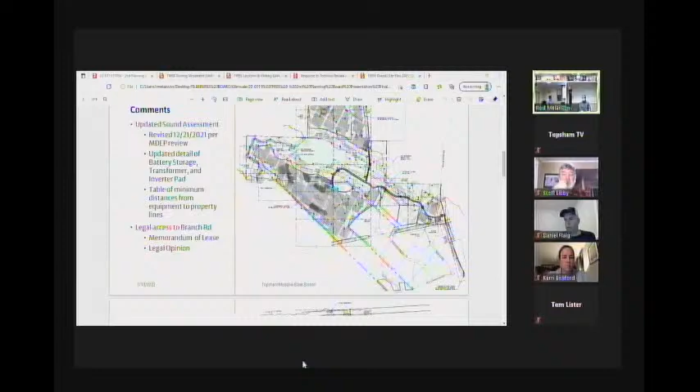So again, we'll start with sound. Through the course of the DEP's review, they had asked some questions to us on the sound assessment. We were actually, at the time of the previous planning board meeting, in the process of working with the sound consultant to update their assessment. We've gotten that back into the DEP for their continued review.

We sent a copy to Rod with our response to the planning board comments back just before Christmas. The crux of their revisions were to provide a little more detail on some of the ancillary noise components to the project. And then through our coordination, we updated the detail of one of the pieces of equipment, a battery storage transformer and inverter pad.

To effectively consolidate the inverter piece of equipment, the DC inverter, into one piece of equipment. And they also provided a table at the end of the report to show minimum distances which we comply with for the equipment around the site. So not sure if the board has any questions on that topic before we move on.

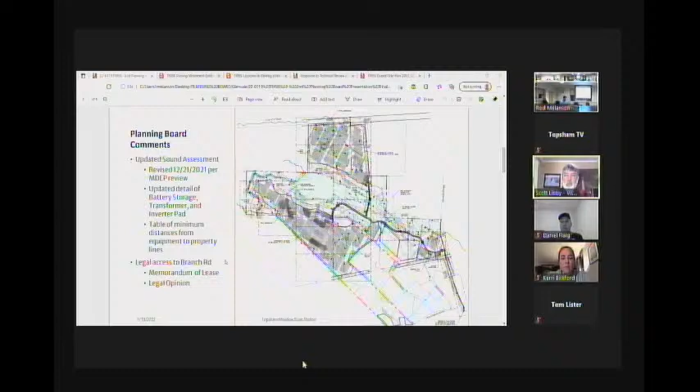All right, did anyone have questions on the Branch Road easement? Nobody here, so okay, let's move on to the parking laydown area.

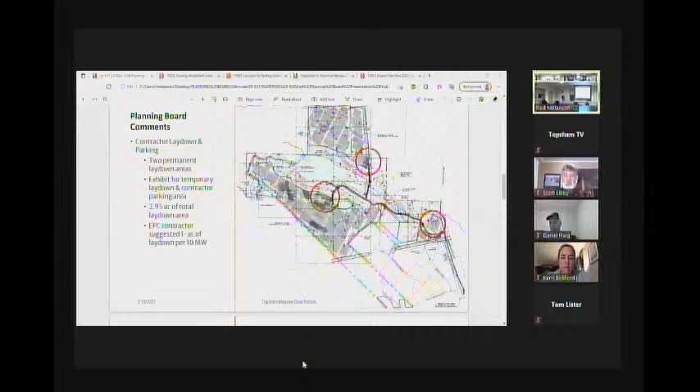So the three circles on the plan—this one and this one are the two permanent design contractor laydown areas that we had included in the plans initially. Through the questions that came up from the board, we wanted to show a third potential area. This would be more of a temporary laydown area, in a general location, but it's an existing cleared portion of the site. If you want to scroll to the next sheet.

So that's right there at the entrance to the project. The white outline of the area here is about 1.5 acres, and that allows for a number of parking spaces. We fit about 40 right in this area, which a contractor that the applicant is working with estimated somewhere around 30 that they would be looking at. Plus, that allows for a large laydown area in and around there, so trucks, especially in the beginning phases of the project, can come in and drop materials right there to then be moved around within the site as needed.

So we felt, as you noticed on the previous slide, this is in an area that an array will eventually occupy. But the thought is that the construction of those two arrays will likely occur close to the conclusion of the project construction. So this would be a very good area to use as laydown until we get to that point. It's relatively flat, and the grade shouldn't be an issue right in that area.

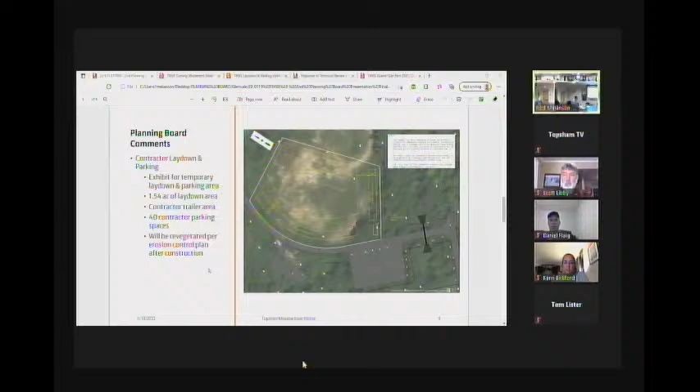Did anyone have questions or comments to make on this portion? Where's the second laydown area? Well, I understand where that one is, because I finally figured it out. Where's your other laydown area? So there's the 3 circles there. Oh, okay, so the other 2 would be more focused as they get into those 2 different parts of the project. Okay, got it. Thank you.

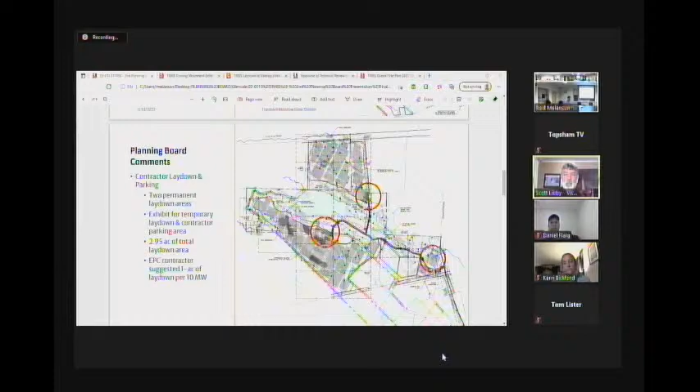Okay. I also had one other question - this meeting is being recorded. For my notes, there was also a question about the traffic. I don't know if we meant a traffic study, or if it was a traffic count and kind of the sight lines coming in and out of Old Lisbon Road. Is that something you've talked with Rod about?

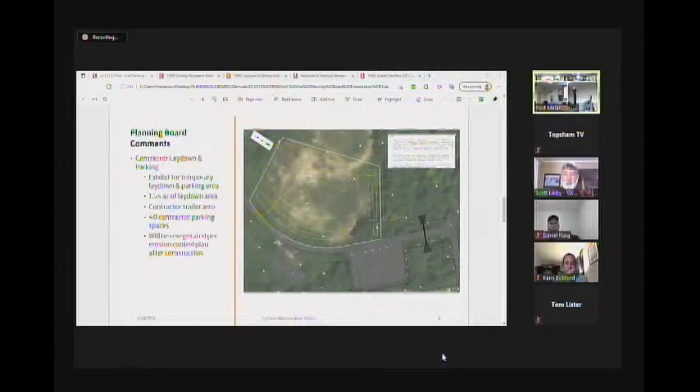Yeah, so you're going to address that. He did a traffic movement template that will show - we had one of the technical comments that was a turning template, requesting a turning template out of Old Lisbon Road. All right, do you want him to continue? I'll let you keep going then. Okay.

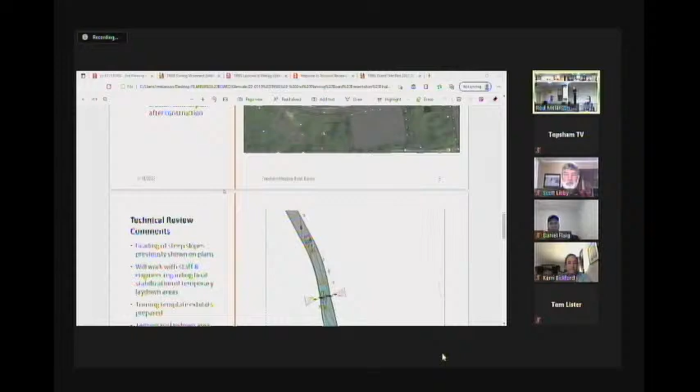So ultimately, Mr. Saucier had generally four comments that he had made. We got them in an email on Friday of last week. He asked about - we had referenced in our previous reply some regrading of certain areas to get slopes within the arrays down into the 12 to 15% range. We had shown them on the plan. He asked about that and essentially was articulating that those had been shown on the plans.

The second comment was with regard to one of the laydown areas. A portion of it is proposed to be gravel, and another portion is proposed to be out of a wood chip organic material, enough to provide a good stable surface for certain items without being a full-blown gravel surface. You asked about essentially the removal of that mulch layer and replacement with topsoil. We've requested in our letter to see if that would be allowed, to assess that area once construction is over and see what type of vegetation is starting to naturally grow in the area. That was our intent - it would be an organic area that vegetation would ultimately naturally reestablish itself when it became somewhat dormant.

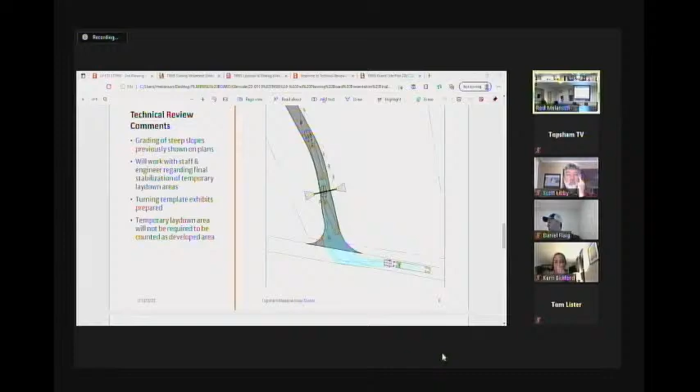So the third comment pertained to the traffic moving in and off of Old Lisbon Road, right here, going into Branch Road. He had asked that we do an auto-turn to demonstrate that not a full-size WB-67, the biggest of tractor trailers, but the next size down, a WB-62 - that refers to the wheelbase - be able to make the maneuver into the site and around. In the presentation right here, I only have this one movement to demonstrate, but Rod has the PDF of the other movements that I had provided earlier today.

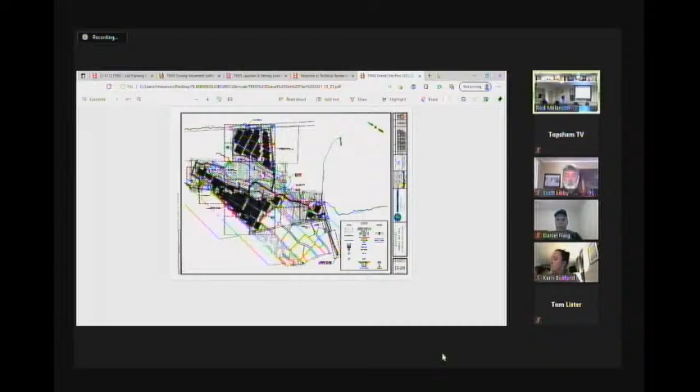You want me to share this? Sure. Mhm. And then that would be turning the next one over. Yes, sir. Yep, so.

So again, this is Old Lisbon Road right here with Branch Road, and this is the WB-62 coming into the site. This over here is that same truck leaving the site, to the left. As you can see here in the shaded area, the travel path of the truck stays within the confines of the gravel on Branch Road and the pavement on Old Lisbon Road.

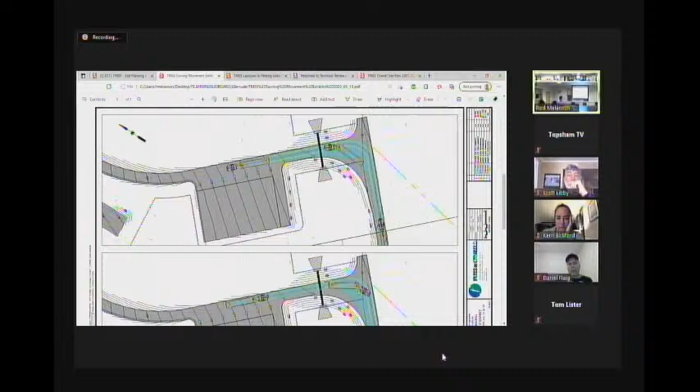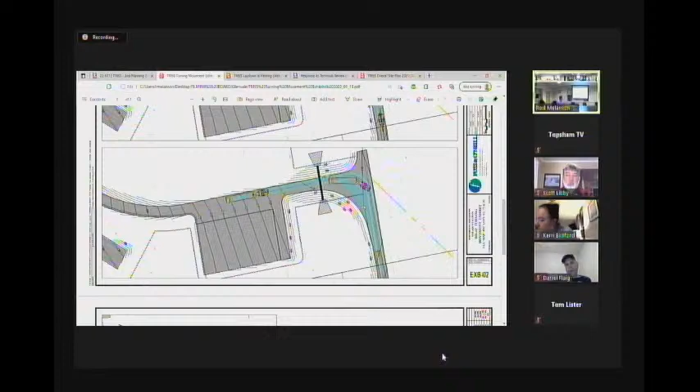Now scroll down to the - and then this is the truck. We did widen this radius out as part of our last-minute change. This truck maneuver comes in, stays on the gravel, and then down here would leave the site, staying on the gravel. Again, we did provide an updated plan that has this radius widened out to accommodate that.

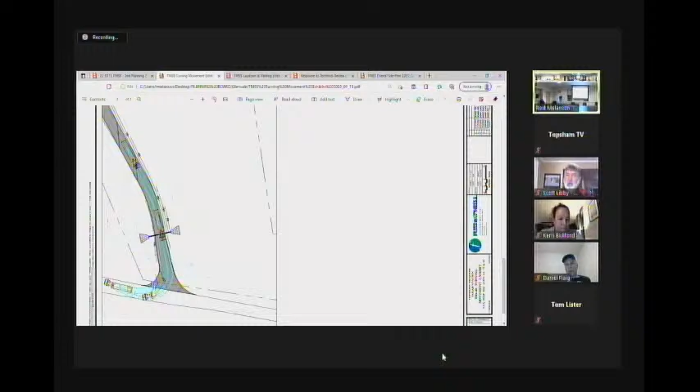So now scroll on to the next. This maneuver coming out of Branch Road onto Old Lisbon was a little tighter with the WB 62. The travel path of the trailer came through this area, in very close proximity to the property corner. This truck that we have shown here is a WB 40.

So through previous coordination with staff, we had prepared a traffic control plan to address this issue, that the largest of vehicles that would enter the site may have difficulty accommodating that turn there and might have to turn left out of there.

So we've updated and addressed that in the traffic control narrative, so that if the truck has to come out and go to the left, because of some concerns of that access between Old Lisbon Road and Lewiston Road, they would then be prohibited from turning left there and would have to make a right turn, go down, and if trying to get to the highway, would have to go down and turn around and come back, so that they wouldn't pose a traffic hazard at that point.

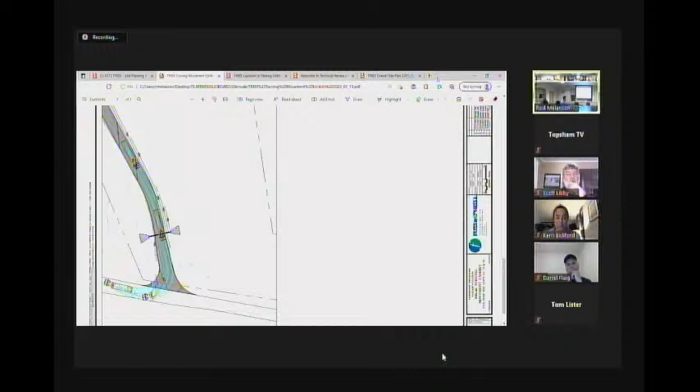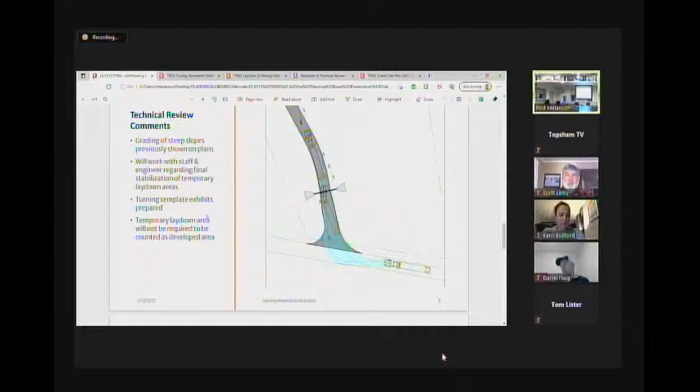And then the final question that Tom had was with regard to the temporary laydown area and how it, and if it would be counted as a developed area from a DEP stormwater standpoint.

It's our opinion that it would be treated very similarly to the areas under the arrays, which they are not counting as developed area, because the criteria there is that if you mow that area and let it grow back into a meadow condition, an unkept meadow condition, that's not counted per their definition as developed.

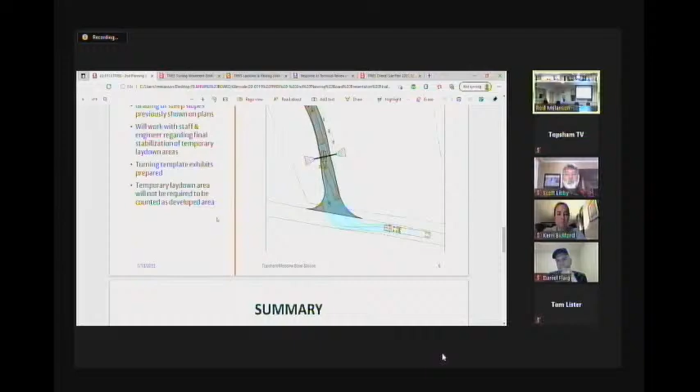So that's how that laydown area that we showed right there at the entrance would ultimately be covered with vegetation, and it wouldn't be in a maintained nature. So that's what we had in response to Tom.

Ultimately we thank the board for considering the application. We think this is a great project to provide critical clean energy infrastructure through the state and meet the state's and local goals for more clean energy that we've noted in our previous meeting. We think the siting of this project is very good. We've done our best to comply with the local requirements and are still working through the state and Corps of Engineers process to get things wrapped up from those standpoints.

All right, thank you. Anyone on the board have some questions or comments on those four technical issues that he addressed? Not seeing any. Oh, no. Scott does. You weren't looking at me, Scott. Yep, you're on mute, Scott.

How many truck trips are you talking about generally? It will be more activity during construction. Ultimately, once the project is developed, there won't be much traffic into the site, it will be very, very limited. I don't even know if it would be maybe a vehicle or two coming in, once or so a week.